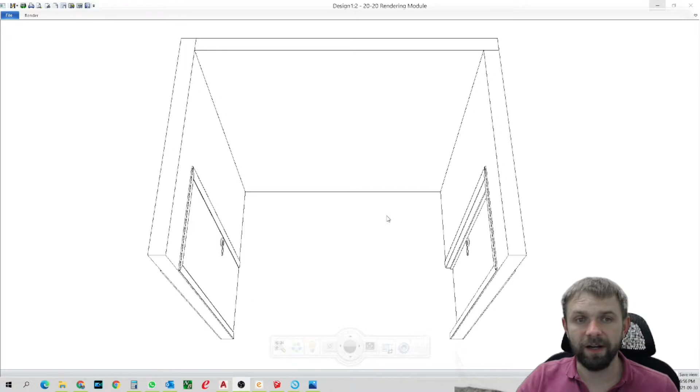One of the options to make it work is to use an apartment style washer and dryer. However, they are very shallow, not as deep, but obviously they have less capacity. So if you're used to using the regular standard 27-inch by 36-inch deep washer and dryer, you're going to be running out of space. It's going to be tight. It's doable, it's possible, a lot of apartments have it, but it's not comfortable.

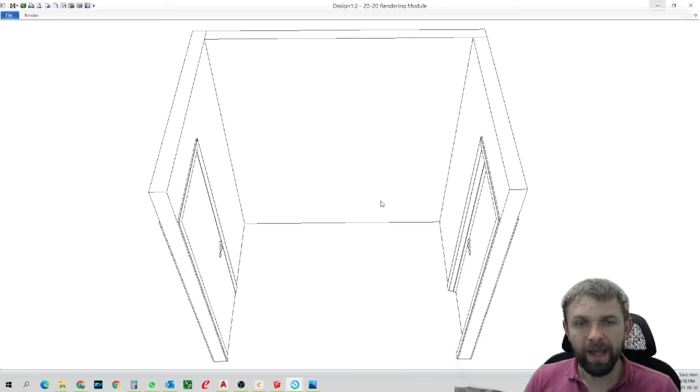So if you don't have a bigger house and you want bigger appliances, you have to become creative, and this is what we're going to be doing. This is our space. In the corner, the clients have the plumbing for the washer and dryer, and if we move them anyway, we have the plumbing already located on the right side, and there's a door.

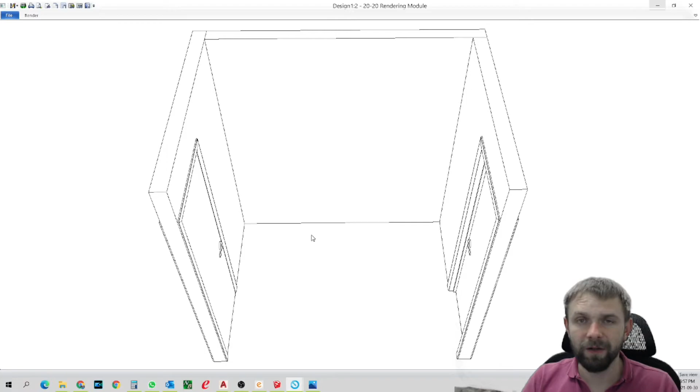On the left side we have another door opening inside, so that door needs clearance, which leaves us with very little space. So what I came up with is making stackable units and putting them in the middle, having it work like that. So this is what we end up getting — this is one of the options.

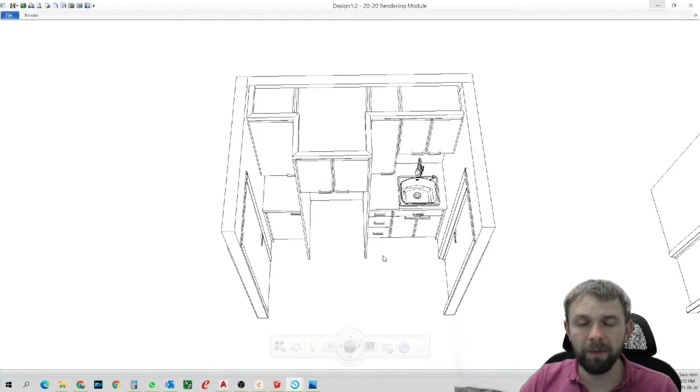With this small space, I just checked the clearance, and this door will be fine — it'll pass the panel with a bit of clearance, so there's no problem with that. We also have to remember the washer and dryer is 32, so this gable is 32 inches deep, but the glass of the washer is still sticking out. So all of that has to be taken into consideration — that's why you've got to review your specifications and make sure everything works.

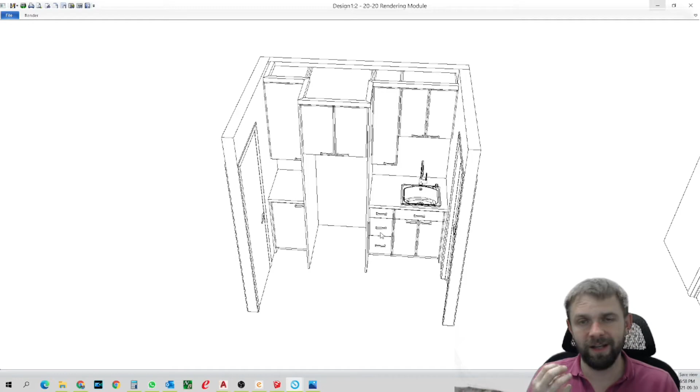On the right side, this could be a laundry sink, 27-inch cabinets, then a 12-inch bank of drawers for your little things that you want to have in the laundry, things you can't just keep on a shelf. Drawers are very useful because in laundry you have stuff out of the pockets that you can put away, change, and little things that you need to store.

And you have a bit of counter space. The way I thought about this is when you come into the laundry, you have your dirty clothes basket that you can put right beside the sink, and you have enough landing from the panel to the faucet. You also separate the sink from the panel because when you're in the laundry, you want to be able to have room and move, and you don't want water splashing on the panel.

I raised the upper cabinet here enough to put a rod, and you're supposed to have enough for short hang clothes. So if you have your sweaters and stuff that doesn't go into the dryer, you need it to kind of hang and let the water drip.

This is a perfect scenario, very popular in a lot of designs. On top of the washer and dryer, very deep cabinet, a lot of storage, so you can put baskets, things that you don't use as often. It's hard to get, but it's there.

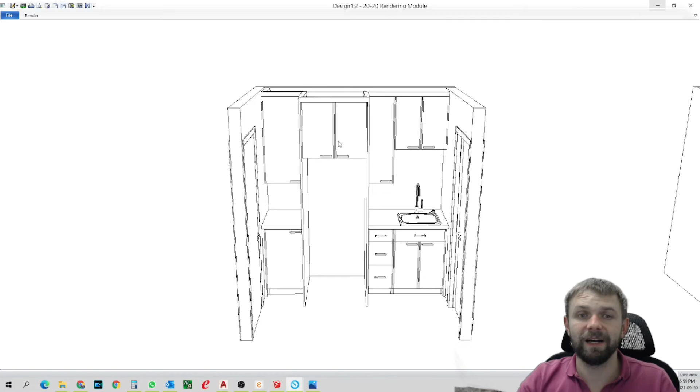And then on the left side, we have a cabinet with a little bit of countertop. So let's say if you're doing your laundry, from dirty clothes on the right, you put it in the washer. Then the clean clothes, you put in a basket on the left.

This could also be drawers if you need more drawers, or it could be a cabinet with a couple of shelves. And if you're using the side door as your mud room for your kids and stuff, this could be where they put their shoes, their backpack, and stuff like that.

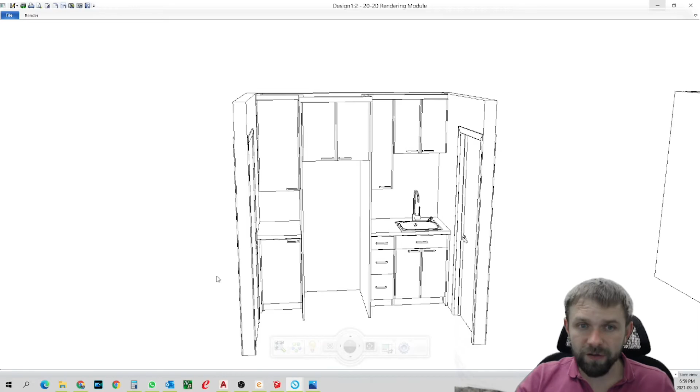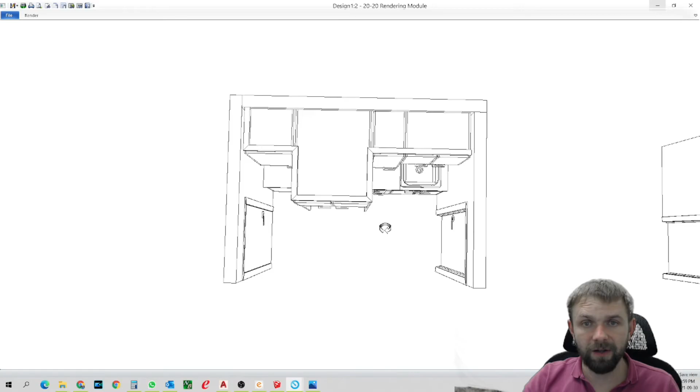This could also be a pantry, but again, when you're coming into the space and you have a big pantry, it also feels a little bit claustrophobic, very tight. So I think having the countertop gives you that little bit of more openness to the space. Even though it is a small space and it is, you know, very bulky, this pantry is sticking out a lot, and there's not much you can do.

We could also maneuver this and move the washer and dryer to the left, and move the cabinets to the right. But then the gable is going to be right against the sink, and it's going to be a little bit tight for washing stuff inside the sink. And I think this is kind of an ideal design.

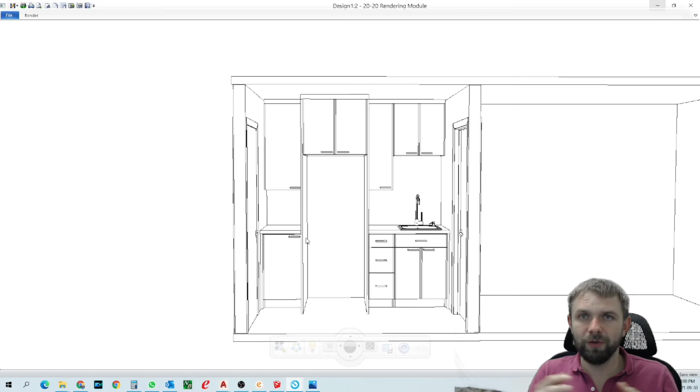We can also split this in half and just have a bigger sink cabinet, shift the sink to the right a little bit, and then make a bigger opening. So this is totally up to you. You have to look at your scenario, how big are your baskets, how are you using your laundry now, and things like that. So yeah, this is just one of the ideas.

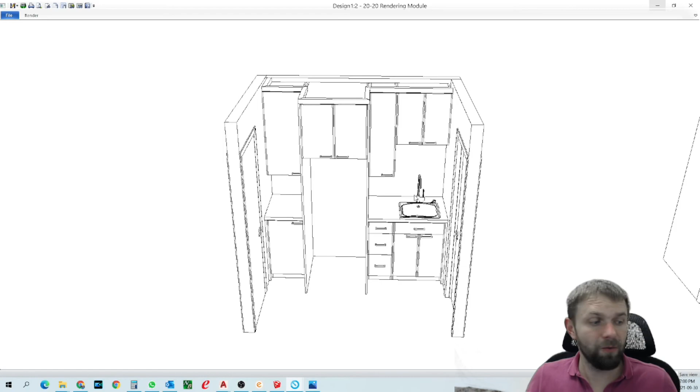It's a very common scenario with the washer and dryer, and it's possible to put the big regular washer and dryer. However, if you want this laundry to be more open space and have a cleaner line, my recommendation is to use a regular apartment style washer and dryer, and just have the countertop run right across, then put the washer dryer right underneath.